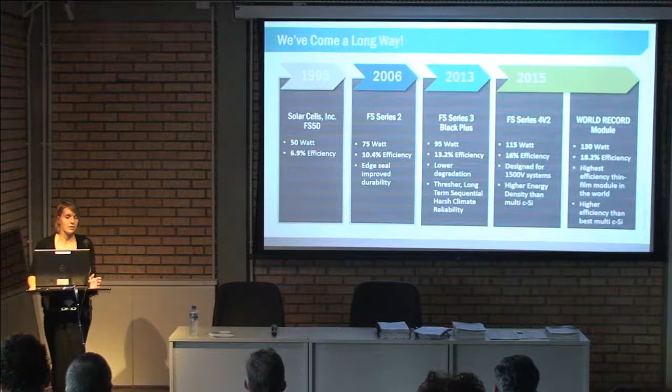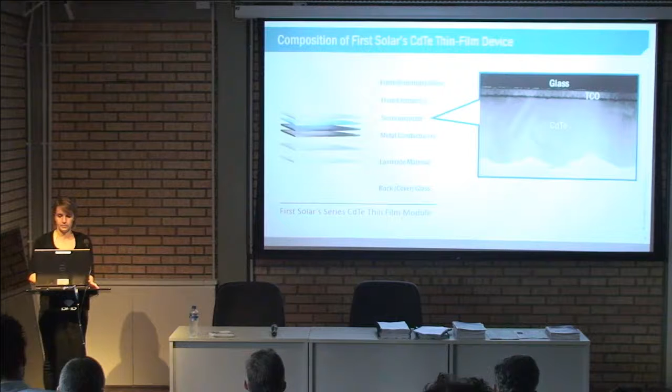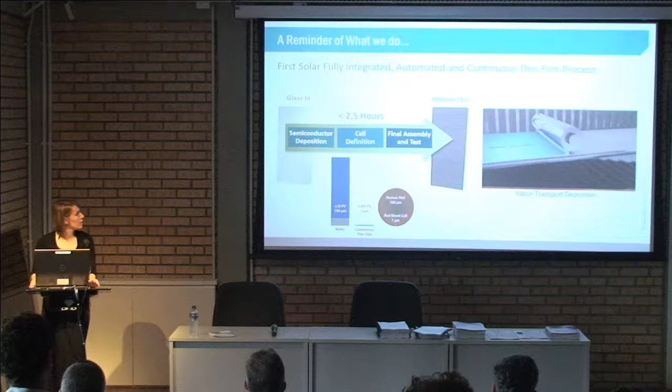Here we have a fun little video of our manufacturing process. Let's see if we can get it to play. There we go. First we have the window layer, cadmium sulfide, deposited by vapor transport deposition, followed by the absorber layer, the cadmium telluride.

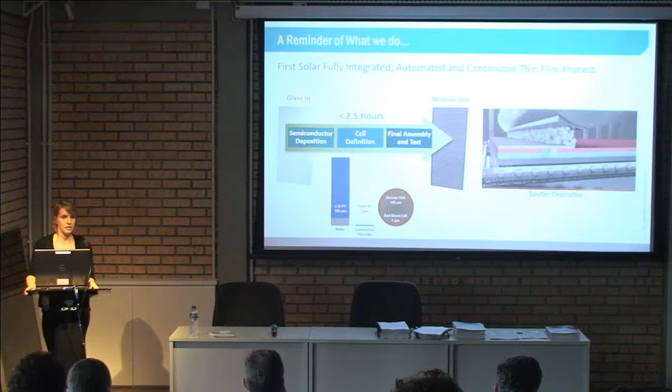From here, the module goes into the first of 3 laser scribes. The first you see here isolates our cells, filling with an insulator. The second laser scribe goes through the solar layer here and is filled in with sputter deposition. This is the back contact, and it connects the negative side of one cell to the positive side of the next. The final isolation of the cells is accomplished with the third laser scribe.

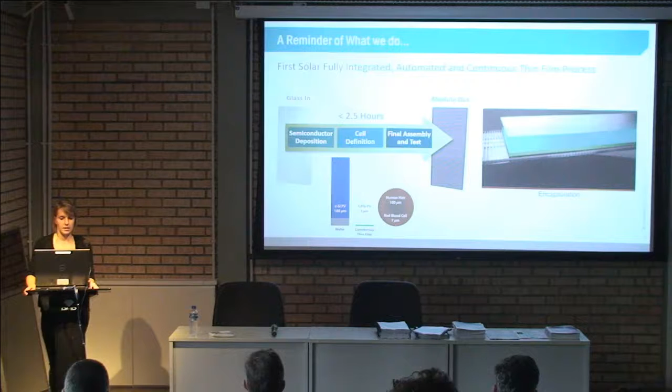Following this, our modules are encapsulated. First we have the bus tape, then the edge seal, followed by the laminate layer, and finally the back glass. At this point, the modules are sent into a high heat process that laminates the modules.

And then before going out into the field, we add the cord plate here, and all of our modules undergo performance testing before being installed. Here you can see all of the layers we just talked about with the flow of electrons through the module.

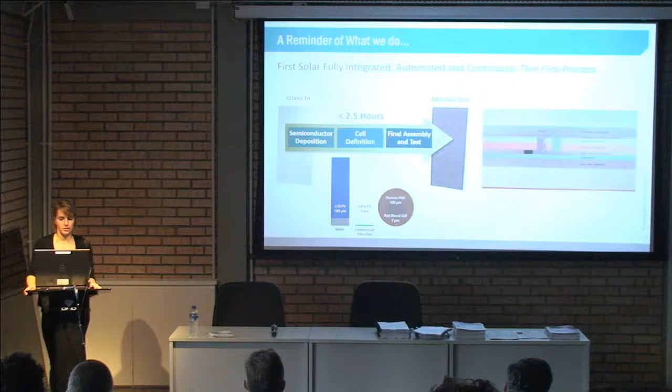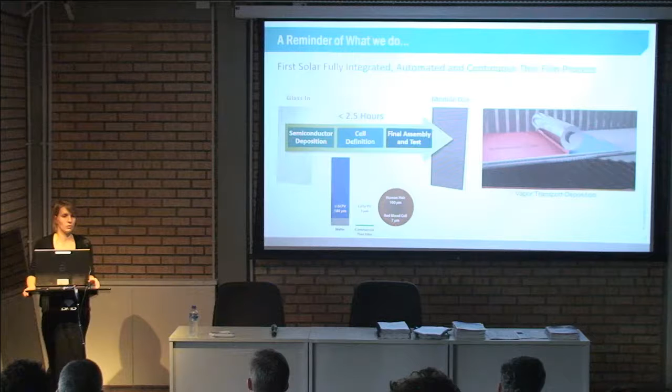One of the important things when we're talking about our manufacturing process is that it all takes place under one roof. So in under 2.5 hours, you go from having a piece of glass to having a functional module. This compared to crystalline silicon, where you may have parts of your process contracted out to third parties, so you don't have as much control over quality and reliability like we do.

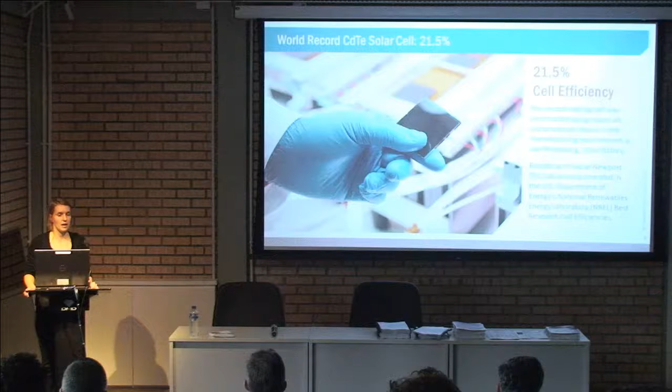And you can see some great examples of our modules right here. We did set a world record this year in terms of cell efficiency at 21.5%. This was certified at the Newport lab.

One thing I like to point out here is that multicrystalline silicon did set a record this year, but it was the first one in 10 years and only showed an improvement of 0.4%.

This module does represent some of the improvements that were made to get our world record cell, but not all of them. We expect this number to go up as we integrate those processes over the next couple of years.

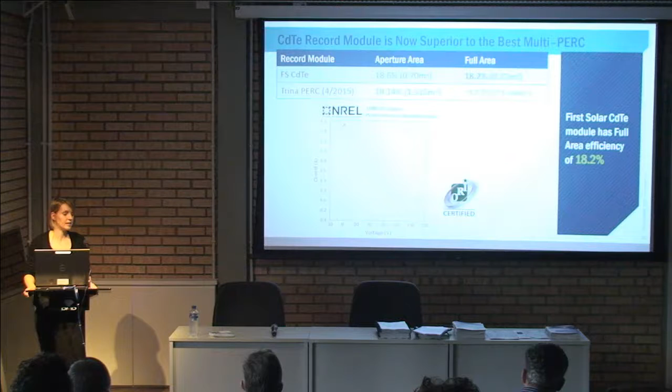In terms of aperture area, this 18.6% efficiency puts us slightly behind the best PERC cell at 19.14%. But what we really care about when putting modules out in the field is not the active area, but the total area, including edge delete and things like that. So if we use that metric, we are ahead at 18.2% over 17.7%.

Of course, efficiency is not the only thing we care about when looking at performance of a PV plant in the field. Here we can see our energy density roadmap, which shows that we continue to pull ahead of crystalline silicon in the coming years. We can see in terms of efficiency, in Q1 of this year, we might have had a slight efficiency deficit, but we expect to close the gap in terms of efficiency by the end of Q4 2016.

And continue increasing that gap. But as I will talk about next, we have a lot of different characteristics to our modules, such as temperature coefficient, spectral shift, and true tracking that give us other benefits in terms of energy density.

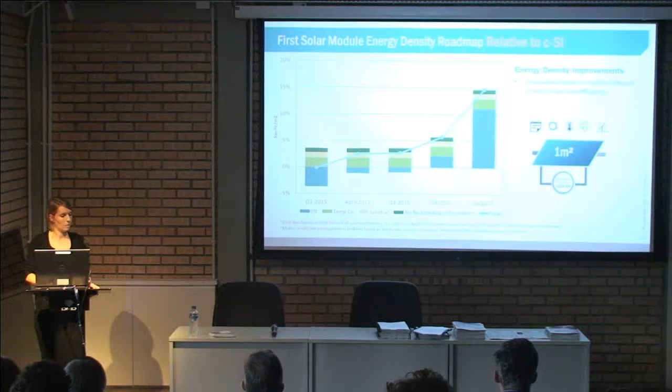So here we are, differentiated performance. First, we can talk about the shading characteristics of our modules. When you install our modules in landscape, they are robust against shading. This is due to the way that they're internally wired in a serpentine pattern rather than in connected rows of series cells. So this causes our shading loss and our power loss to be linear.

So if you have a 10% shading loss, we expect a 10% power loss. This is compared to crystalline silicon, where it's not a linear effect. You may have 10% shading and a 30% output power loss. This allows us to minimize early and late evening energy loss while allowing us to pack our rows closer together.

This gives us a particular benefit when we look at our tracker technology. With this linear shading response, we don't need to backtrack like crystalline silicon modules do. Traditionally, they point away from the sun early in the morning and late in the evening in order to avoid shading, which causes a greater power loss for them and can also cause bypass diode failures.

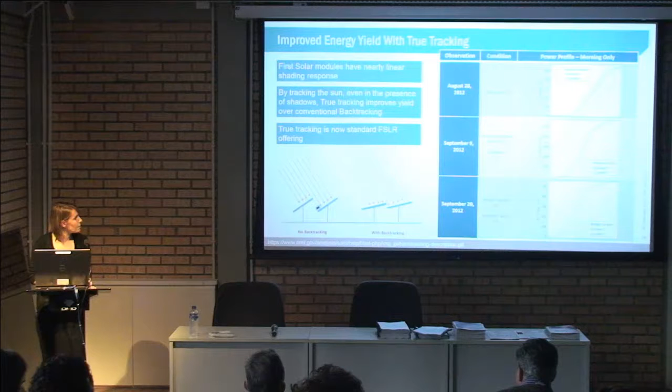So instead of backtracking, we do true tracking, where we continue to follow the sun until it sets in the sky. On the right here, you can see some experimental results from one of our white papers, where we actually had 3 systems where we turned backtracking on and off to see if we actually got the power increase we expected. If we just choose one of these, the one on the bottom here, the median system in black is backtracking, and the other 2 are true tracking. You can definitely see that we have a power advantage with the true tracking.

We also have an advantage in terms of temperature coefficient. Our newest module technology has a value of 0.29% per degree C, and this means that anytime our module temperature is above 25 degrees, we see an advantage in terms of performance for the same nameplate. Especially if you look at typical field operating conditions, where module temperatures could be in the range of 40 to 65 C, this will give us quite a big advantage in climates such as Brazil, where it's very hot.

Here we have a fun animation. We can see a typical day in a hot climate, where we have the ambient and module temperatures shown on the left, and then we can see the power for a First Solar and a crystalline silicon example compared above. So as the sun comes up, we see the temperature start to increase. At the middle of the day, when the temperature is reaching its peak, so also is our energy production, which causes us to get 11.3% more peak power in this case. And by the end of the day, we can see that we accumulated 9% more energy.

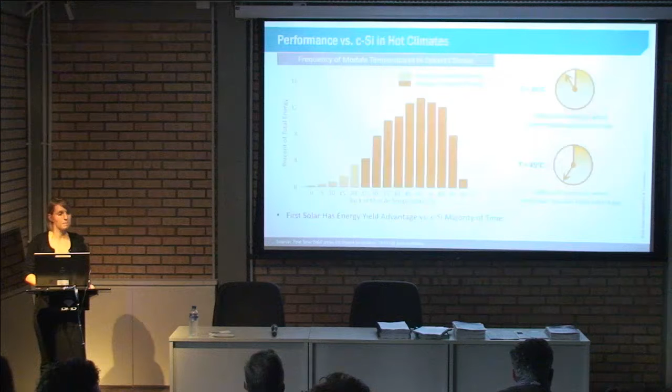This is with the same nameplate power? Correct.

Here's another way to look at it. For a typical hot desert climate, we can look at the percent of total energy produced at each of these back of module temperatures. What it shows is that anytime we're above 25 degrees C, we have an advantage, and this is happening in this climate 90% of the time. And when we are above 45 degrees C, we have over a 5% yield advantage, which is happening over 60% of the time.

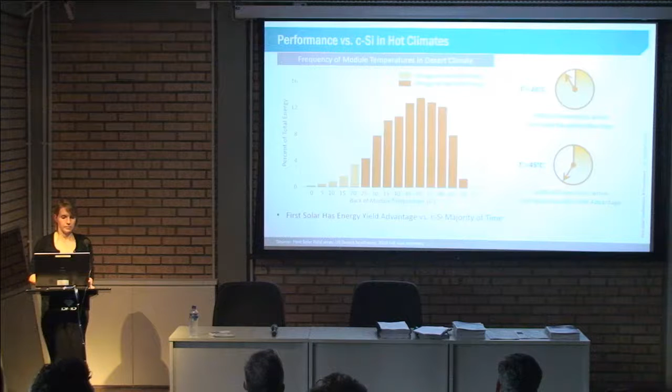It's also very important to look at soiling no matter what climate you're looking at. It's very important to understanding performance. You can see here one of our soiling monitoring stations that we set up hopefully at least 1 year prior to construction to get an idea of the local conditions. One module will be cleaned and one will remain dirty, and we compare the short circuit current in order to quantify the amount of soiling.

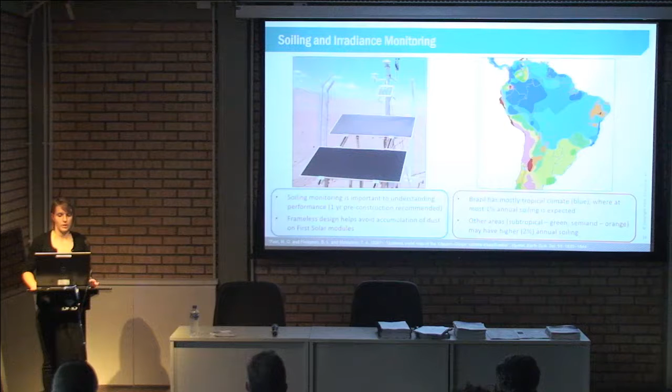Without this data, currently we don't have any of these set up in Brazil. We hope to have them in the future. You can get an idea of the amount of soiling by looking at the climate in the region and the amount of rainfall that's expected.

Just looking at the climate map, the Köppen-Geiger climate map, we see that a lot of Brazil is obviously tropical. This means more rain and we expect less soiling. Other areas that are subtropical, you can see in green here, or semi-arid in orange, we do expect these rates to be higher. One advantage that our modules do have is that they are frameless, as you can see here. This means that when rain or dew even is on our modules and it's rolling off, it can carry the dust with it off the edge without being caught in the frame.

Of course, just looking at a climate map can be very limiting. Here we see a case in the desert US Southwest where it's classified the same as a desert in Saudi Arabia. Here we see a 1% per month rate in the desert Southwest of the United States and a much greater 14% per month rate in Saudi Arabia.

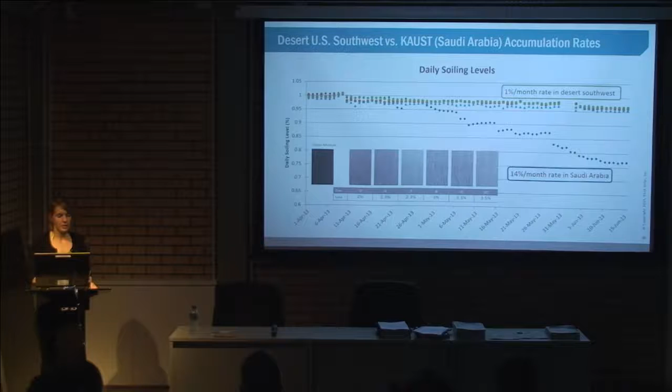It's also very difficult to tell by just visually looking at a module how much soiling is on it. Here we can see an example where we have increased rates of soiling over time, but visually it would be very difficult to tell. Sometimes in our group we even have a little competition where we'll send around a picture and actually guess, and it's very difficult to come up with the correct number just visually.

So finally, we will look at reliability and long-term performance. Traditionally, there have been IEC tests, including thermal cycling, damp heat, and humidity freeze cycling that were used to characterize the performance of a module. These days, we consider these to be representative of infant mortality, so what's going to happen when you initially put out the module in the field, but what we really care about is how it's going to last through the power plant lifetime, 20, 25 years.

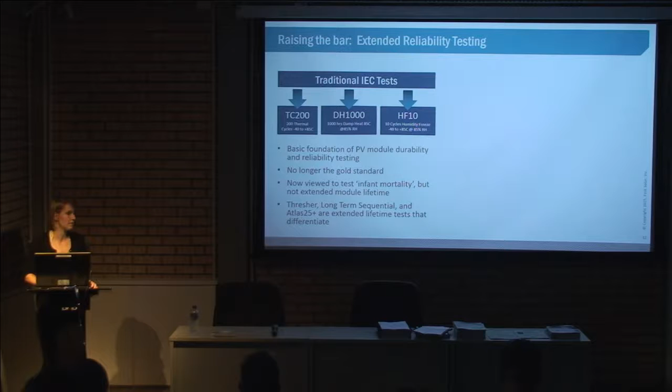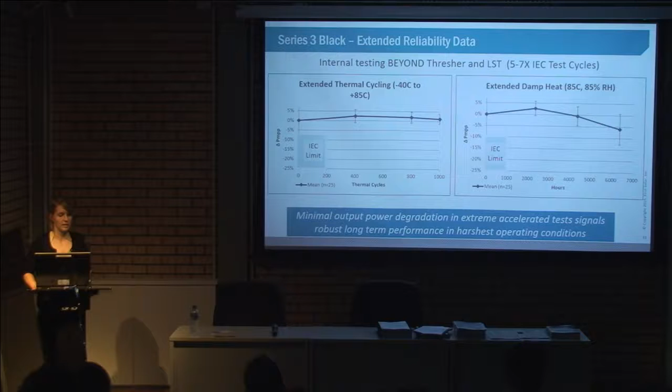Here you can see the results from some of these tests for our Series 3 black modules. On the left, we see extended thermal cycling, moving from negative 40 C all the way up to 85 C and back, where traditionally the IEC limit was only 200 cycles. You can see that even out to 1,000 cycles, we don't see a significant drop in power performance. On the right, we see the extended damp heat test, exposed to high temperature and high humidity for a certain number of hours. The IEC limit is traditionally 1,000 hours, and even out to 6,500 hours, we are still well above the IEC limit of 10% power loss. This gives us confidence that even under harsh conditions, our modules will perform as expected, perform well, and last the test of time.

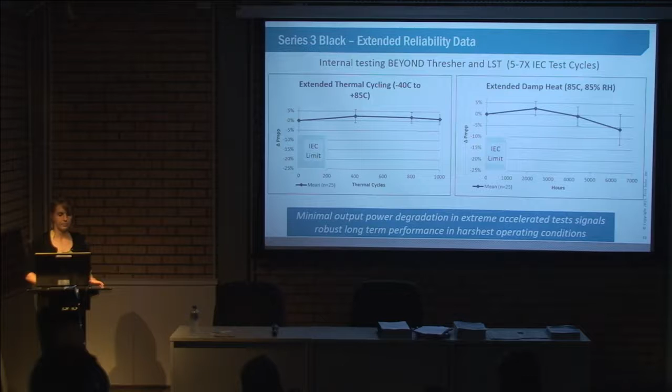How long do you run this qualification or certification? How long does it take in the development of a new series? That's a good question. I'm not sure off the top of my head, but as I mentioned, the Atlas 25 Plus test, being an outdoor test, is probably the one that takes the longest because it does include 12 months of field exposure.

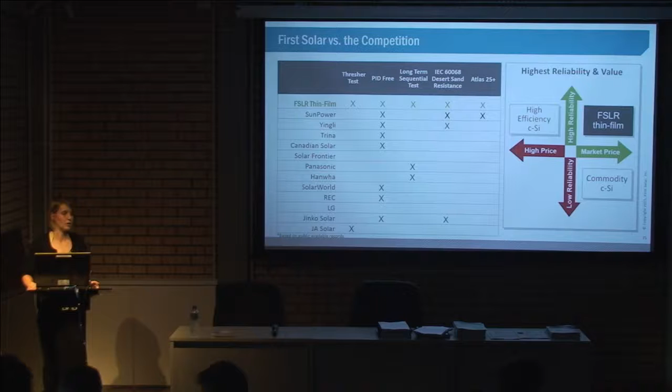And here you can see all of the different tests that we have passed, and you can see that we are the only module manufacturer to have passed all of these tests. Of course, even though this indicates that we do have high reliability, we are not one of the high-price manufacturers on the market, so we're really offering good value and ensuring that you will have quality into the future as well.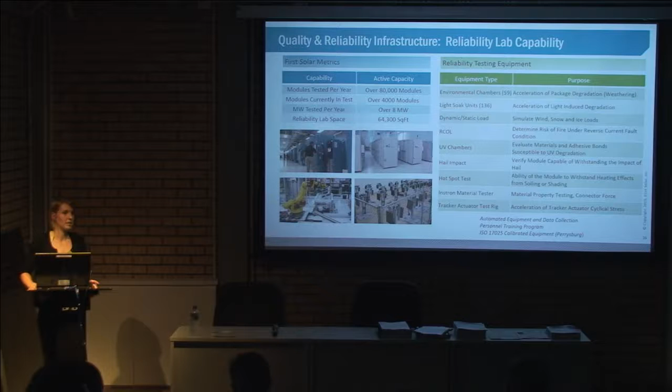Besides testing in the lab, we need to look at real-world outdoor performance as well, and to do this we have test sites around the world — a couple in the United States, Malaysia, Chile, India, and the Philippines, and we hope in the near future to have one right here in Brazil as well. This allows us to compare our technology's performance to our competitors, evaluate new technologies, compare to old technologies, and look at any reliability issues that may come up.

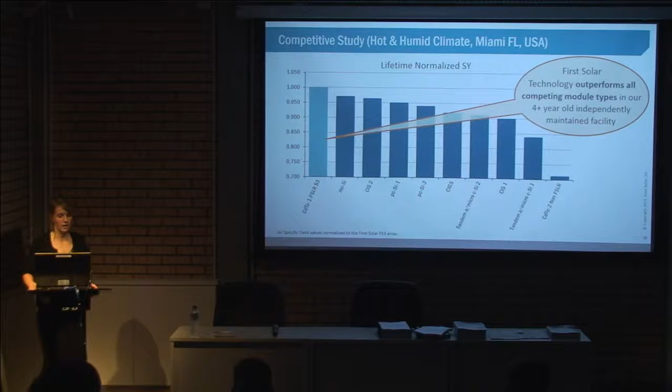Not only do we have testing that we do ourselves, but we also perform well in independent tests. Here you can see an example of a 4-year-old test being conducted in Miami, Florida, where we are compared side by side with multicrystalline silicon, CIGS, amorphous silicon, and other thin film technologies as well. In terms of lifetime normalized specific yields, we have been outperforming all of these other technologies.

One of the things that my group is most proud of is our benchmarking program, where we compare measured performance to actual predicted performance. In this case, we've looked at nearly 1 gigawatt of capacity spread over 20 different sites and 4 countries. The oldest of these sites is now about 5 years old.

Here you can see a histogram of model error for these 20 different sites. We're looking at error at the energy meter. On average we are predicting within 0.12%, with a standard deviation of 1.91%. This gives us confidence that not only are our plants performing well, but we can tell you exactly how they will perform. And with that, I think that's the end of this first piece of the presentation, and I'm happy to take any questions.

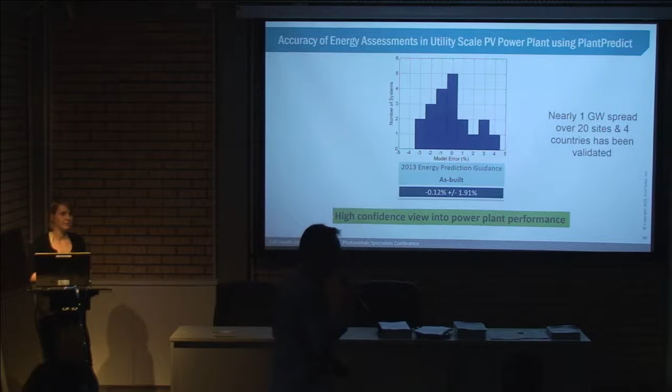I saw in the power range of your models that you are going to 100 something watts per module, so you have quite small modules compared to polycrystalline modules in the market. Do you see increasing the power range with your technology, or will you stay with this 120 watts? As we move forward in production, as our efficiency increases and our area stays the same, we do expect our wattage to continue to go up. I believe the modules that we're doing initial testing on are already 120, 125 watts.

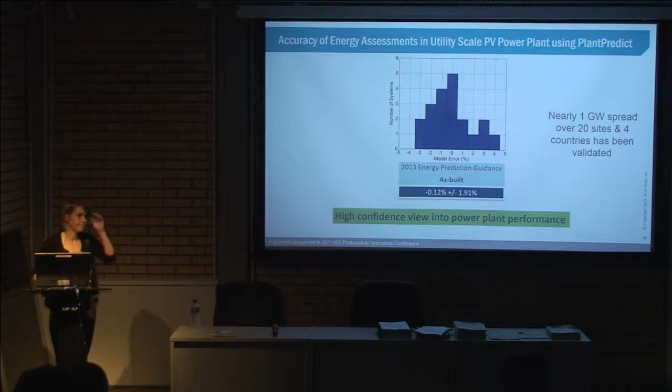This brings additional wiring with it, because you have wiring to the lower wattage modules. Is this a main concern in your technology? To answer that question, we will be moving in our next series, some years out yet, to what we're calling a module assembly, where we'll have 3 modules mounted together on a back rail. So you can imagine that functionally this will be very similar to a larger, higher wattage module from a different manufacturer.

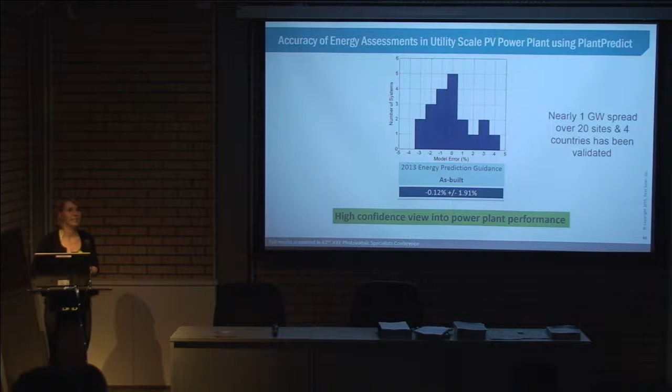Hello. About the lifetime of the module, do you have any tests that could imply that the module would have a bigger lifetime than 25 years? Any kind of certification that the module would last for about 35 years?

I am not sure specifically, but just looking at the results as I showed from the IEC extended testing, where it shows minimal output drop even over extended cycling or extended hours at extreme conditions, I think this could indicate a lifetime that would go beyond that. But of course it will still be experiencing that degradation rate, so your power output will decrease slightly from year to year. Thank you.

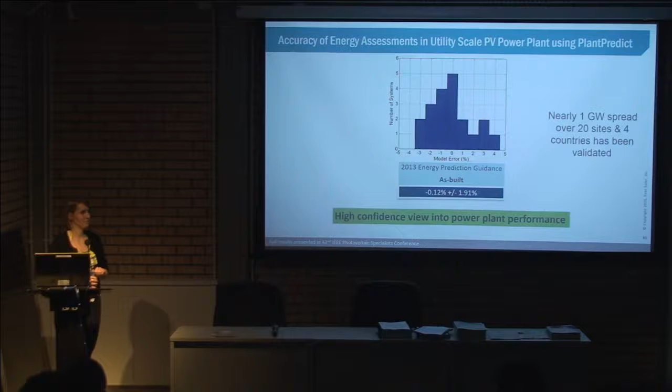But you've been running a number of utility scale plants now. Do you see that same kind of trend of degradation rates in your large PV plants? Yes, we do. The oldest plants we have data for now are around 5 years old, and this doesn't give us a lot of time to look at degradation rates, where it can obviously be a very noisy metric when looking at field data. But initial results, if you group many sites together, do show that we're in line with this number in our utility scale plants.

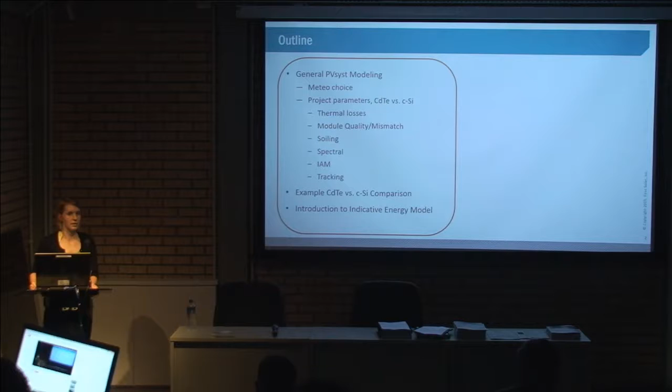Other tools we find useful when performing modeling are, of course, Google Earth, for looking at siting options and other geographical things we might need to take into consideration, as well as Meteonorm, of course, for looking at different weather files. We do have an energy prediction bundle that gives detailed guidance on a lot of the things I'm talking about today. If you're interested in looking at these documents, please ask for them. We're happy to give them to you.

So first, looking at choosing a weather file: of course, we want to use the highest resolution available. We all know that in PVSYST there are options to just use the data included there, but that is only a monthly weather file that's then broken down somehow into an hourly file, and we don't expect those to be very accurate.

We want to use data that represents typical mean years, not extremes. This usually means satellite data collected over several years and averaged together. We'd rather look at this than a raw time series that's only a year long. If you are going to go out and buy a weather file to model our technology, you will need either precipitable water data included, or relative humidity and ambient temperature, for the spectral shift component of the modeling.

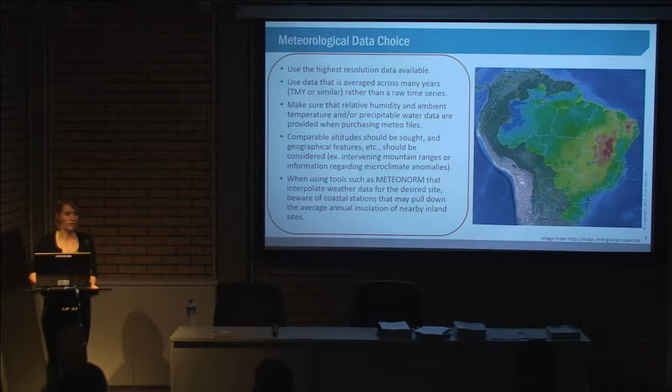Here you can see some of the weather data sources we regularly use. A lot of the ones listed here on the left are only United States data. Here in Brazil, I think the ones that will be most important will be Meteonorm as well as GeoModel Solar, where you can definitely get the local weather data you need, as well as hiring ground-proofing services as well.

Now we'll go specifically into some of the parameter assumptions for cadmium telluride versus crystalline silicon. Here you see the table summarized, but we'll be stepping through each of these in order, starting with thermal modeling.

Coefficients traditionally in PVSYST, the defaults for a utility scale fixed tilt system are 29 and 0. These are for the constant loss factor and the wind loss factor. You can think of these as the free and forced convection terms if you're familiar with heat transfer.

However, we weren't happy with the results we were getting using these defaults, so we looked at our measured data at several different sites. Here on the left, you can see the average temperature residual, the modeled minus the measured value, as a function of the plane of array irradiance.

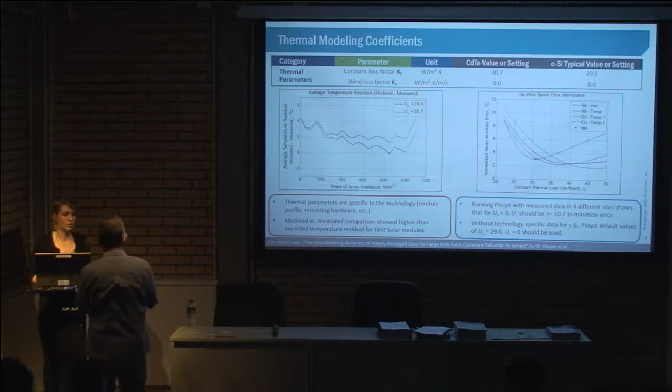In blue, we see how this profile looks using the defaults, and in green, we see the profile using our guidance of 30.7. You can see that we get much closer to a residual of 0 with the green line, the 30.7 value, without passing it.

The fact that we don't go past the 0 line means that in general we are still more conservative. On the right, you can see how we arrived at this number. We looked at 4 different climate types, including hot and cold in North America and a couple different sites in Europe as well.

Here you can see the thermal loss coefficient as a function of the temperature error again, and for each site you can see the optimization, where the best value would be the lowest point in the trough. What we ended up choosing was the most conservative value, which is the lowest thermal loss coefficient of 30.7, for the hot climate in North America.

If you have a higher thermal loss coefficient, you will have more cooling, and this will bring your module panel temperature down. So you can see why a lower thermal loss coefficient is therefore more conservative.

Looking at crystalline silicon technology, they have not done any of these studies, so we recommend you still use 29 and 0, the defaults in PVSYST, because these thermal parameters can be very technology specific. It depends on the profile of the module, the way it's mounted, and everything like that.

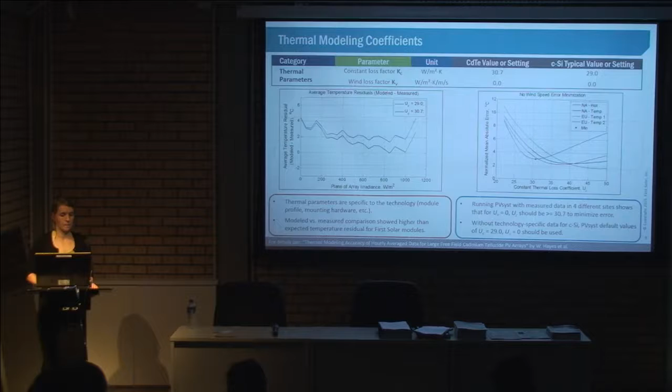Looking at module quality and mismatch, we have traditionally used a value of 1% for module quality. This is actually representative of what we think of as DC health. So going out into the field, we have traditionally seen that about 1% of strings were disconnected, leading to about a 1% loss. We hope to bring this value down in the future by looking at more recent power plant data, but in this case we have used 1%, and we don't expect crystalline silicon to be any different, so we matched those to make our simulations more comparable.

Same goes for power loss at MPP, again 1%. Crystalline silicon, as you all know, also has light-induced degradation, or LID. This typically means they have a 2% penalty when being modeled.

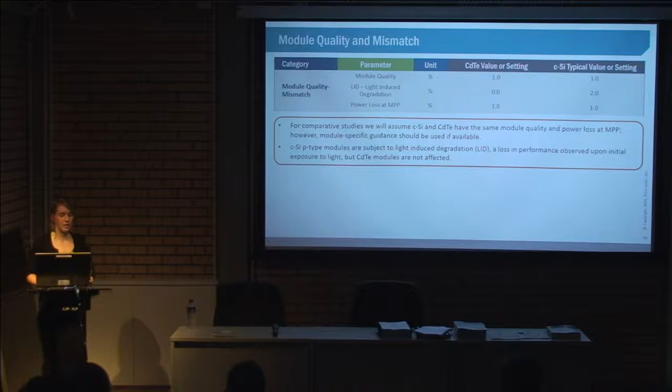We can look again at soiling here briefly. You can get an idea of what the soiling rates may be by looking at climate type, but it can be very local depending on agriculture nearby or local weather patterns. So it's very important, if possible, to get real measured data on the ground. In this case, we've assumed that cadmium telluride and crystalline silicon will have the same amount of soiling. One important note is that in PVSYST, when modeling cadmium telluride, you will include the spectral shift.

Now we get into the nitty-gritty of spectral shift. We have published repeatedly on this topic, and we will be publishing again on it in the near future. We've demonstrated that you really need to include this in modeling our technology to match expected performance. It's not currently included in PVSYST. It's on their list of things to do, but we haven't managed to bully them into doing it quite yet.

Here you can see on the right the PPI, Power Performance Index, an indication of how well the modules are doing, in 2 test arrays in Mesa, Arizona. You can see the spectral shift plotted on top of it in red. As our time trend continues, we see that these 2 metrics match very well.

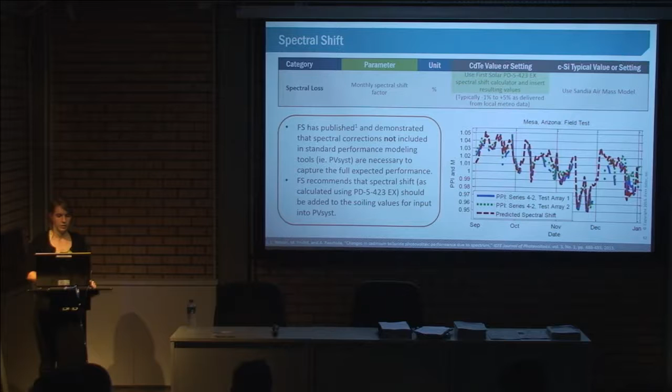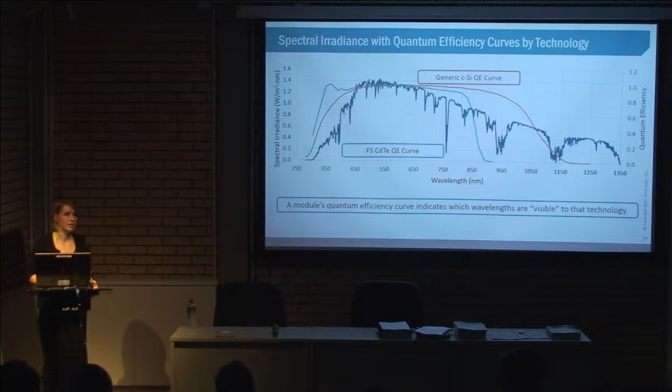Similarly, our modules only see certain wavelengths of this full spectrum, First Solar out to about 900 nanometers, and crystalline silicon out to about 1250. Please note here that the quantum efficiency curves shown here aren't necessarily related to the efficiency of the panel. That is related to the number of electrons that are produced from incoming photons, or the spectral response.

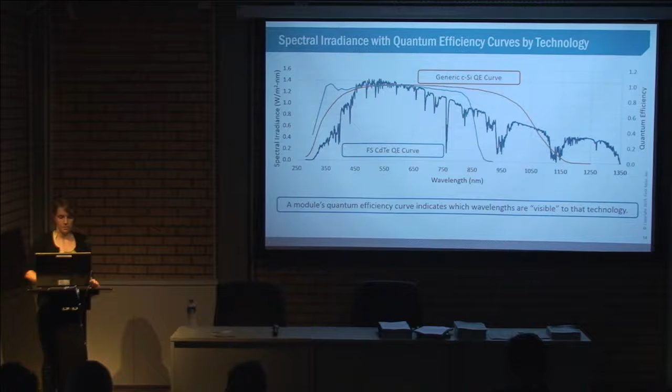So if we compare this to a broadband pyranometer, broadband meaning that it reads a broad band of different wavelengths out to about 2800 nanometers in a typical Kipp & Zonen model. Cadmium telluride only cares about wavelengths out to 900 nanometers, and crystalline silicon sees wavelengths all the way out to 1250. Of course, again, this is not necessarily related to efficiency. That is more a function of the module material, which is related then to its band gap.

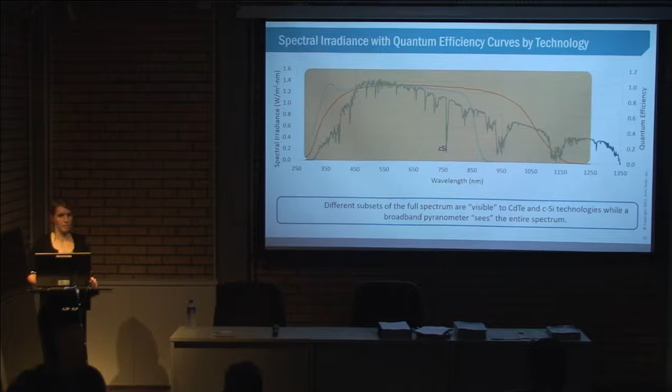And why we care about the width of these absorption bands that each of these modules sees are these water absorption bands shown here, where the largest of these are seen by the crystalline silicon module, but not by the cadmium telluride module here. This means that when the atmosphere has a high precipitable water content, these absorption bands will increase, and we will still have the same number of useful wavelengths, where crystalline silicon will have fewer.

I think it's most helpful to look at this in terms of an example, so we'll show that here. Here we see the standard G173 spectrum again with our two QE curves plotted on top. And at the bottom we can see our broadband pyranometer reading, which we know at standard spectrum is 1,000 watts per meter squared. And in this case, to make it simple, we'll look at two side-by-side modules, one cadmium telluride and one crystalline silicon, where they're both at 100 watts.

Now, we're going to increase the precipitable water content while keeping the total amount of irradiance the same. So we're thinking about the total irradiance as the area under the full curve all the way out to 2,800 nanometers for the broadband pyranometer.

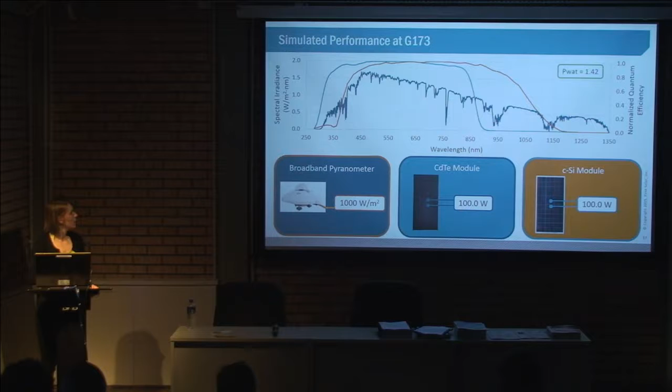Here you can see our precipitable water content is now 4.5. We've picked a very extreme value so you can visually see the shift here, but we're still at 1,000 watts per meter squared. So you can imagine for this curve to have the same area underneath as our previous example. If these water absorption bands are increasing here, the rest of this curve moves up slightly.

So under our cadmium telluride curve here, we see a gain in terms of the useful irradiance. If we're looking at crystalline silicon, overall we see a little bit of a gain, but it has this large loss due to these absorption bands. So if we look at the power output of each of these as calculated using the SMARTS model, we're looking at a 4.7 watt increase for cadmium telluride and a 1.2 watt increase for crystalline silicon.

Conversely, if we have an extremely low value of precipitable water, in this case 0.45, if we're holding our total amount of irradiance the same, we see these water absorption bands increase a little bit in the upwards direction. This means that the rest of this curve comes down a little bit. So most areas under the cadmium telluride curve see less useful irradiance, and the wavelengths included under the crystalline silicon curve see more because of these absorption bands here.

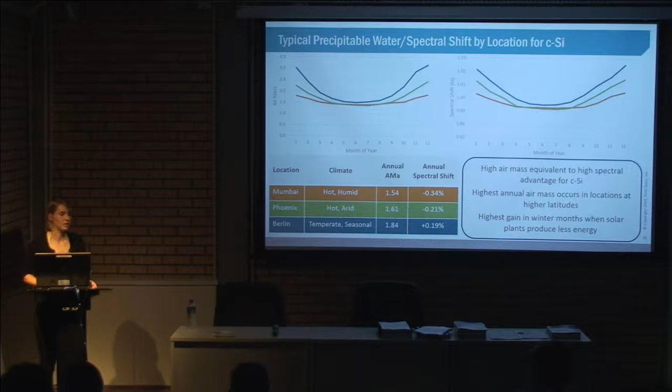We notice that the highest gains are in the winter, which means solar plants are producing less energy when there's more gain for this technology. So on an annual basis, the gain is much smaller. And in terms of the magnitudes of the shift due to air mass, it's much smaller than the ones we saw for cadmium telluride due to precipitable water.

Here we can see the correlations side by side, where on the left we see the cadmium telluride series 4 correlation. This was calculated empirically from 13 different sites using the SMARTS model. We have an extended publication on this concept if you're interested. Again, higher precipitable water content is equivalent to a higher spectral shift. On the right, we see crystalline silicon, where the Sandia array performance model computes it as a function of air mass. Higher air mass, higher spectral shift.

Moving on from spectral shift, we can look finally at tracking. So which parameters should you use? You should generally use whatever the tracker that you're using specifies. So if your minimum tilt angle is -60, as for this example with the NextTracker technology, that's what you should use. And again, if you're using First Solar cadmium telluride modules with a linear power loss, true tracking is much better than backtracking. So you should definitely uncheck the box in PVSYST.

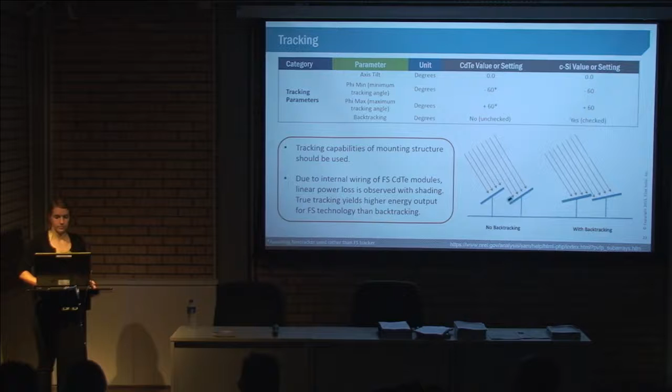Now we'll look at a specific example in Brazil. Macaúbas, Brazil, was chosen for this example. We used a Meteo file, TMY3, typical meteorological year data. We have a fixed energy target that we chose as an example of 50.3 gigawatt hours with tracking technology, using NextTracker with limits of -60 to 60, site azimuth of 0, and overall soiling rate for both technologies assumed at 1%.

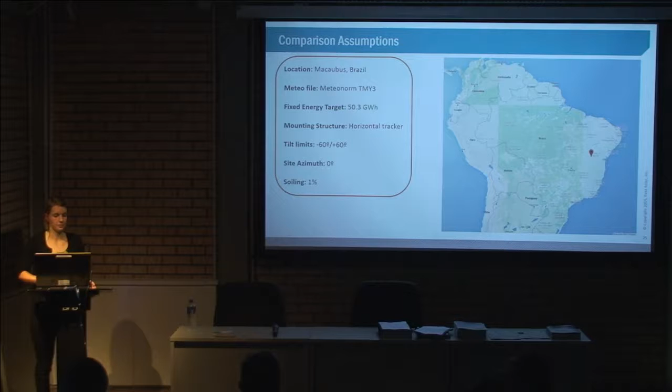Here you can see the system design, starting with the module. We have our Series 4-2 module at 115 watts. For comparison, we used one of the ones we've been seeing in competitive bids, the Yingli 315 watt modules. Of course, due to their different characteristics, we'll see a different number of modules in series. In this case, we chose the 1 megawatt GE inverter that we've partnered with, at 1500 volts. For crystalline silicon, we used the 1000 volt 800 CP US inverter.

In terms of number of inverters per PCS, we chose 3 for our GE inverters and 2 for crystalline silicon. Then we have to multiply the output of the inverter from PVSYST by 8 for CdTe and 15 for crystalline silicon to match our DC and AC capacity output at roughly 27 megawatts DC and 24 megawatts AC. We can't have partial strings, so they're not exactly the same, but if anything, our crystalline silicon has the slight advantage here in terms of capacity. This gives us a DC-AC ratio of around 1.1. We also made sure to match our ground coverage ratio, defined as the collector bandwidth, or the height of the active technology, divided by the row spacing. In this case, our ground coverage ratio, or GCR, is about 44%.

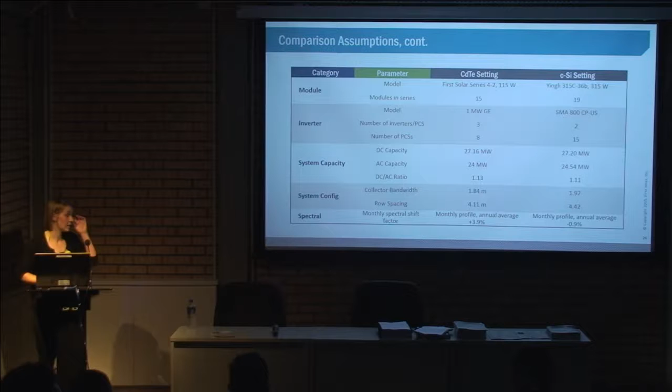Here you can see the numbers we calculated for spectral shift. In the case of cadmium telluride, we have a very large gain in climates like Brazil, as we discussed—here it's 3.9%. Crystalline silicon actually has a slight disadvantage here with a loss of about 1% annually. If I can get this to work, I'm hoping to show you how we calculate these numbers easily. This is one of the things included in our energy prediction bundle, and it helps you not only calculate spectral shift, but know exactly what values you should be plugging into PVSYST.

Usually we use precipitable water, but if you don't have that data available, you can also switch to using relative humidity and temperature. And then here we've assumed that our DC health number, or our module quality, is 1%, and you'll see how that comes into play in a second.

If I go over to the weather file that we used, all I have to do is take our GHI column here. I'm going to copy that whole thing and paste it into the blue here for GHI. And then also the precipitable water column, which will be way over here. There it is.

And please note that precipitable water is not equivalent to rainfall. It is a measure of water that's in the air, not the annual amount of rain that falls from the sky. So you can see as soon as we plug that in here, monthly spectral values have been calculated. At this point, we can also plug in our monthly soiling value, which in this case I have assumed is 1% every month.

You can see the next column here adds these two numbers together. And at this point, we realize we have a problem because all of these numbers are negative, and PVSYST will not allow us to put in negative soiling numbers. That's where this module quality number comes in here, since it has a very similar effect, basically limiting the amount of irradiance that reaches the panel.

We can actually subtract that number from our module quality. In this case, we subtract 3.3%, and we can use negative 2.3% as our module quality, where we are allowed to put in a negative value, and then add what we subtracted here to our soiling values, in order to model this accurately. So if you do open the spreadsheet and use it, what you really need to remember is how to enter your different data columns, and then that you need to input what is in green: your new module quality, and then your monthly soiling numbers.

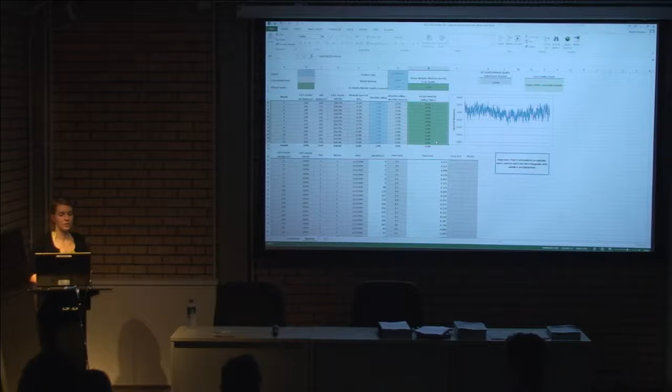Okay, so let's move on to looking at the results here. Here you can see our firm energy number plotted, as well as the upper limit and the lower limit. We have tried to design our CdTe system such that we meet the first year energy at the very upper limit, so we're producing the maximum amount of power without having the penalties for going above the upper limit.

So if we look at transposition on POA, how much sunlight is actually reaching our modules, we see a benefit from true tracking of 2.7%. If we look at the near shading, with true tracking we expect more shading, and we see that penalty here of 2.3%. We also, due to true tracking, have a slightly different IAM profile at the beginning and the end of the day, in addition to having a different IAM profile specified in our module file.

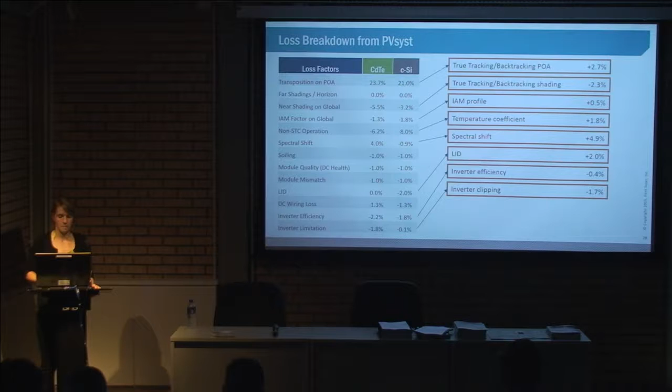So overall, we see where all of these differences come from. And of course, we can increase our DC capacity of our crystalline silicon system in order to match that first-year target. However, to do that, we have to add 2.25 megawatts, or 8.3% more capacity. Of course, we won't be charging you 8.3% more for our technology.

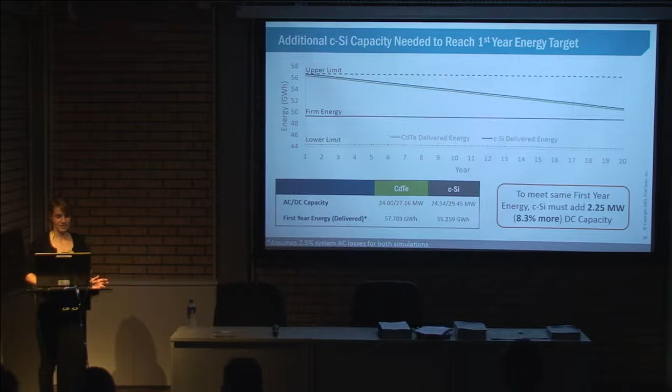Finally, I'm going to speak a little bit about our indicative energy model. Essentially, this is a simple scaled back version of our internal software known as Plant Predict. The reason we have this internal software is because we're not content with what PVSYST offers us.

In Plant Predict, we can look at sub-hourly timescales, so if you want minute data, you can do that. We can model spectral shift, develop and test new algorithms, and it also has a lot more detail in terms of post-inverter losses, everything from medium and high voltage transformers to transmission losses and everything in between.

Hopefully someday this will be a commercial competitor of PVSYST, but in the meantime, we have this available for free to our customers. Again, it's a scaled back version that allows you to do many simulations very quickly without all the fuss involved in PVSYST.

Here we can see what the different inputs to the model are. We do have the full Plant Predict set of algorithms behind this, but all the parameters are defaulted, such as temperature coefficient. It has all the module information in there already, things like that. You can easily select a Meteo file here.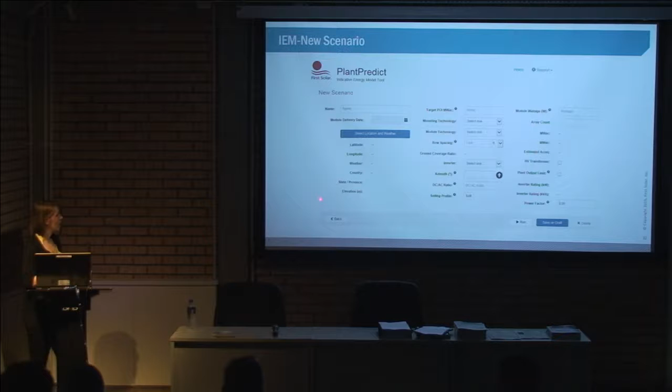I'll show you what that looks like in a second. You can choose your AC capacity, tracker or fixed tilt, whether you're looking at First Solar modules or one of our competitors, row spacing, inverter, azimuth, DC-AC ratio. You can input a monthly soiling profile if you would like, module wattage, and array count to look at the number of rows and the shading effects.

Here you can see also you can include a high voltage transformer and specify a plant output limit and power factor.

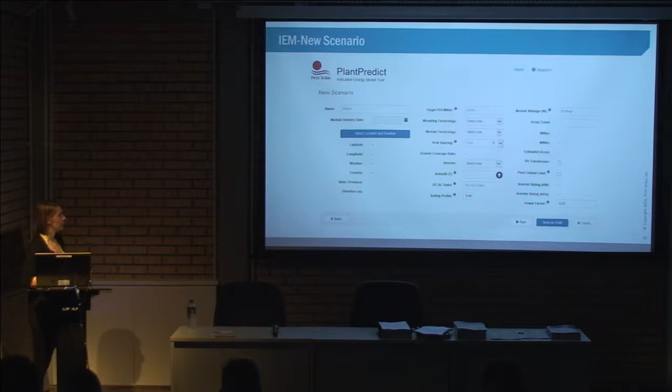Here you can see the weather selection tool, where it will come up with a map based on your input location. It will search within a 25-mile radius for any weather files that are already in our database. So in this case, there was already one for Rio. If there isn't one already, you have the option to pull weather data directly from our Meteonorm database.

Once you've set up your simulation, it's very easy to copy a simulation and just change one variable or two as you prefer. I think in this case I was looking at different DC-AC ratios for a fixed case in Honduras. And all of these simulations I probably created and ran within 5 or 10 minutes at the very most, which for those of you that have used PVSYST before, know that that's quite a bit more time involved.

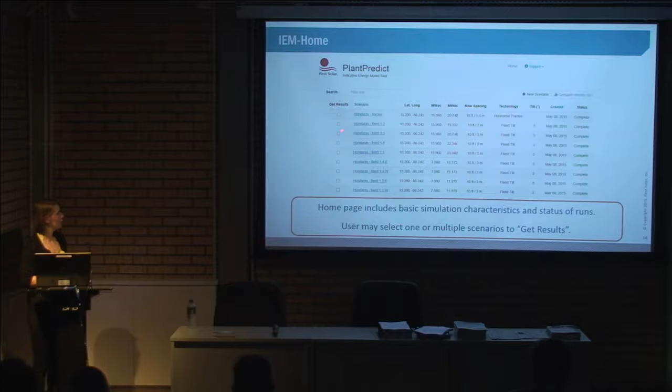Once I've done this, what I can do is check all of these boxes and click Compare Results. What we see as an output in Excel is a very useful side-by-side comparison of all these simulations. We see all the different project parameters side by side. We can look at the first year net energy production, specific yield, things like that.

We have all the same loss factors as you would find in PVSYST here, and then also an 8760 time series hourly output. We have run some comparable simulations both in this tool and in PVSYST, and we've seen very good agreement so far.

So if you're interested, please let us know and we can set up an account for you to test it out. And with that, I'll take any questions you might have.

Hi, my name is Ernst. The Meteonorm database is not valid for Brazil. Why not use the SWERA database? I'm sorry, I don't think I caught that.

The question he was asking is one that we will ask you a lot about. There is a Brazilian solar atlas from a project called Solar and Wind Energy Resource Assessment Project, where we have a 15-year database that is validated for Brazil. And we know that Meteonorm is not validated—they just have satellite data and it is not validated. The question is why you're using Meteonorm instead of other databases that are available.

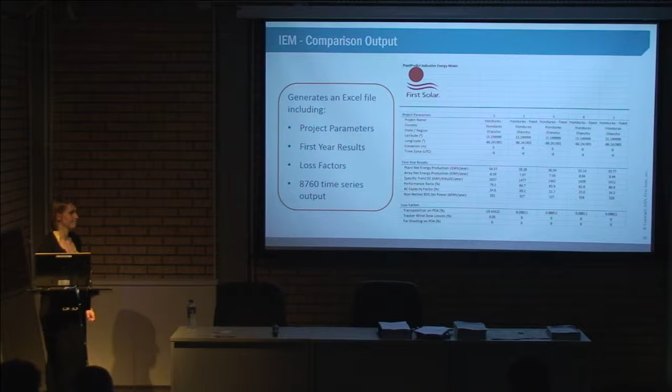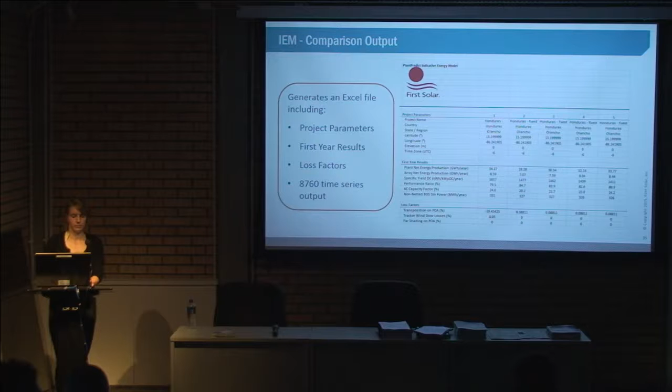I'm Daniel from VEG. I have a question about the water - it's not so clear for me. In dry and hot weather, these modules don't show so much advantage. It shows bigger advantage when you have a hot and humid climate. That's right. I think our main solar resource in Brazil is in the northeast, where we have some dry weather. No, it was just a question. And I have another one.

When you talk about the tracking system you showed, using real tracking, I would say you admit some shading instead of having no shading but longer spacing. You have a slide that shows this well. I understood that with your cadmium telluride it's better to have a slight shade than to not have a direct position to the sun, right? Is it because it's linear, or why do you get that? We couldn't do it with polycrystalline.

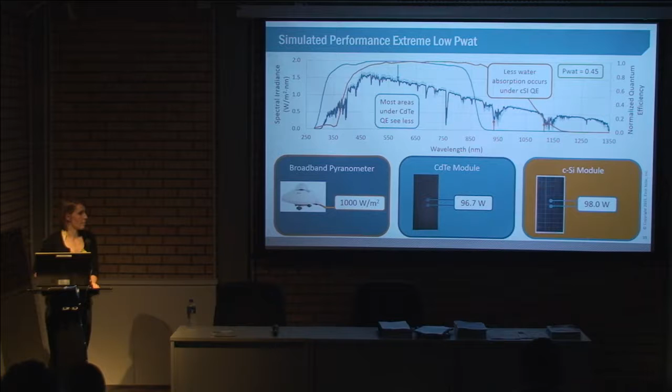So first, on your question about module performance in a dry region - it will definitely depend on how dry it is, and if it's seasonal, that will affect it too. You can see here this was a very extreme example of 0.45, but anytime we are above the ASTM standard precipitable water of 1.42, we will see this advantage. So it depends. We don't see levels as low as this example in regions other than, say, the Atacama Desert. But in general, most places we've simulated have seasonal rainfall, which can be correlated with the amount of water in the atmosphere, so we'll see some gain, or at least not as much loss as crystalline silicon will. Now, moving on to the shading...

I think actually in my other presentation I have a better picture for this.

Excuse me, I'm not an electrical engineer, but what I understand is this advantage is due to how our modules are wired internally. If you shade our modules in landscape orientation, since they're wired in a serpentine pattern, we're not basically shading one cell of each series connection. This is why we have a more robust shading profile, while most mono and polycrystalline modules are connected such that you get a nonlinear shading loss.

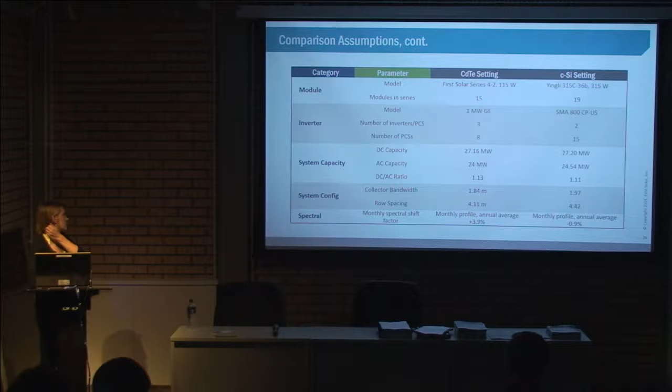The spectral shift is based on input data from PVSYST itself, from our Meteonorm weather file. So you saw me pull up the example where I was copying GHI and precipitable water from my hourly TMY3 file - that's where this number comes from. That file also includes air mass, which I plugged into the Sandia array performance model to get this number.

And system voltage is 1500 volts in each case? It was 1500 volts for the cadmium telluride and 1000 volts for the crystalline silicon. Okay.

And I also have this example in PVSYST - if you're interested in looking at the project file, I'd be happy to share that.

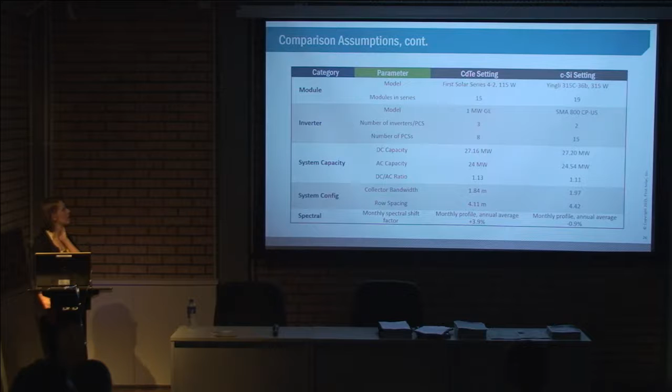And how about the DC-AC ratio? Why are you using just 10 or 11, 13%? People are going more towards 20% sometimes. Yeah, and of course as the DC-AC ratio goes up, we won't have quite as much benefit, as that extra energy gets clipped at the inverter. But I chose this one specifically because we've seen similar DC-AC ratios from other EPCs and developers.

And have you run, for these two examples, what the PV system total cost would be? I think Miguel might go into that a bit later - I believe he has an example. Being on our technical team, I'm pretty insulated from the business/money side, so he's the guy for that question.

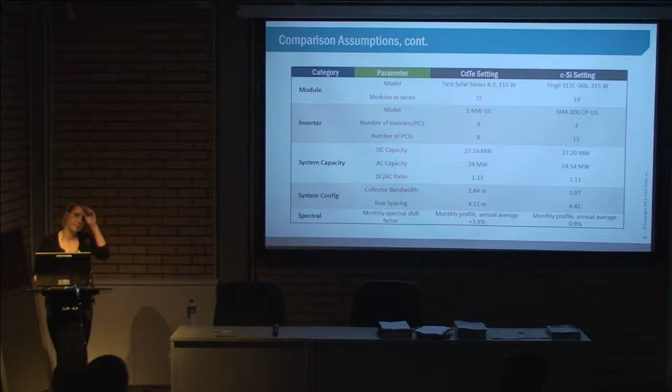Okay, the question, Miguel, was for those two 27-megawatt power plants, what is the expected CAPEX for each one? But if you're going to cover that later, you can leave it for then. I have some information. Okay, thank you.

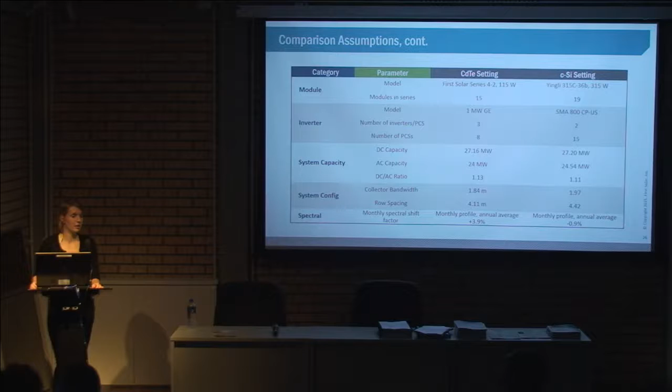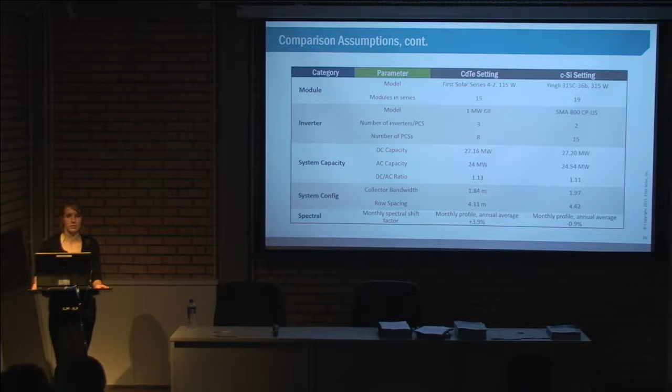I think in the next slide you have your inputs for soiling. Oh, I just used 1% every month. Yeah, we are seeing here in some of our projects soiling rates which are much higher than that. And I wonder if you have had a chance to increase the soiling.

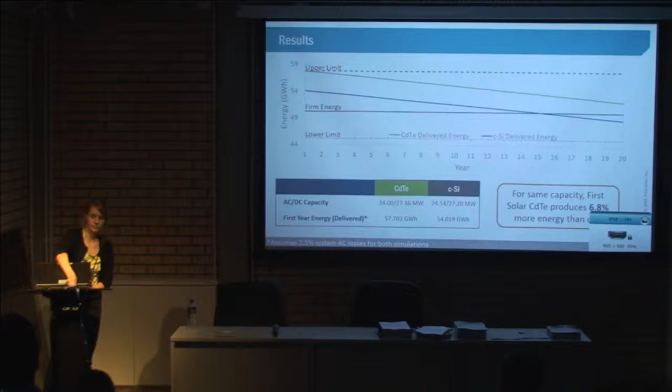And if there are any specifics on the spectral sensitivity of soiling, because soiling can affect different PV technologies differently. This is what we are seeing in one of our projects. Depending on the soiling type, we can have much higher than even 5%, even close to 10%, here in Brazil at sites with utility scale power plants.

Also, we are just getting started with this kind of study on the spectral sensitivity of soiling. Do you have any experience on that? We have somebody in our group who is our soiling expert, our dirt guy, so he could definitely answer this in more detail if you want to contact him later. I'd be very interested to see any results you have on these soiling analyses. There is obviously a spectral difference with soiling as well.

As we increase the levels of soiling, if you are seeing 5%, I think you will actually see a benefit for our modules. Again, not only because they're frameless, they may collect less dust and it'll slide or blow off very easily, but also if we have more soiling, that'll bring us below the clipping limit of our inverter, so we will see the full benefit of our spectral and temperature advantages.

Okay, one final question on the temperature coefficient. Over the years, going from series 2 to series 4 now, your temperature coefficient has changed, slightly increasing over time. Can you tell a bit more about that? It used to be 0.25, now it's 0.29.